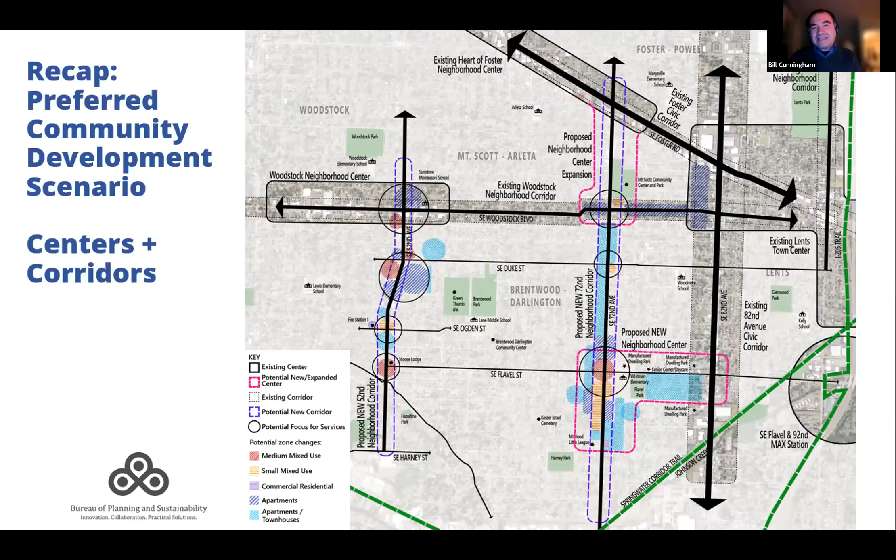Just one other thing I wanted to share with people is just to remind us of one reason for this effort: our existing designated neighborhood centers are places that really anchor the area with services, and that includes the Woodstock Neighborhood Center, as well as the Heart of Foster on Foster Boulevard, as well as the Lents Town Center. And as you're probably aware, there's a bit of a gap in terms of the Brentwood Darlington area in terms of having a robust business district and housing opportunities near a place like a center.

So that's part of the reason we're looking at that 72nd and Flavel area.

I want to put a caveat on what I'm sharing now. I sent in advance the concept for potential zone changes. What we did here was take our existing zoning map, so all the colors and zones shown are already in place, but we overlaid black outlines on areas we're looking at for potential zone changes, using red labeling to identify the potential new zones for those areas.

True to the concept, most of these zone changes are focused on the center locations and those corridors. It's impossible to make out this map, so I'm going to zoom into area-by-area discussion points. We'll hold off on discussion until we get there, but I also wanted to give people a refresher or overview of the zone changes we're looking at.

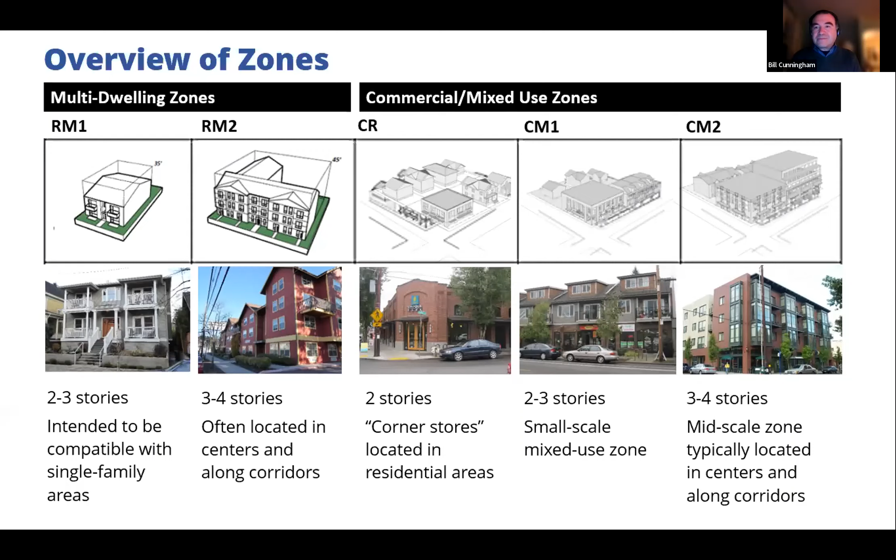I'm going to move us along. Just wanted to highlight topically the kinds of zone changes we're looking at, corresponding to the preferred scenario concept we had. There are some upzones at key intersections, which I've circled here. In many cases, we're going from the low-scale mixed-use CM1 zone and bumping up to the CM2 four-story scale. Also for the RM1 low-rise multi-dwelling zone, some of those existing zoned areas are being considered for RM2.

We also have a number of zone changes related to expanding multifamily housing options along the corridors. Especially along 72nd, this could involve zone changes from single-family residential to the low-rise RM1 zone. In some cases as well, especially along Woodstock, going from the low-rise RM1 zone to more of a corridor-scale RM2, especially when you're getting close to Lents. I'll zoom into that area a bit further.

And then we have our, whatever we're going to call it, but I'll call it the Brentwood-Darlington Neighborhood Center for now. The idea behind some of the potential zone changes here is we're adding additional commercial zoning to support the idea of that becoming a Main Street area or a commercial services hub for the community, and also providing additional multi-dwelling housing close to those existing and potential future services.

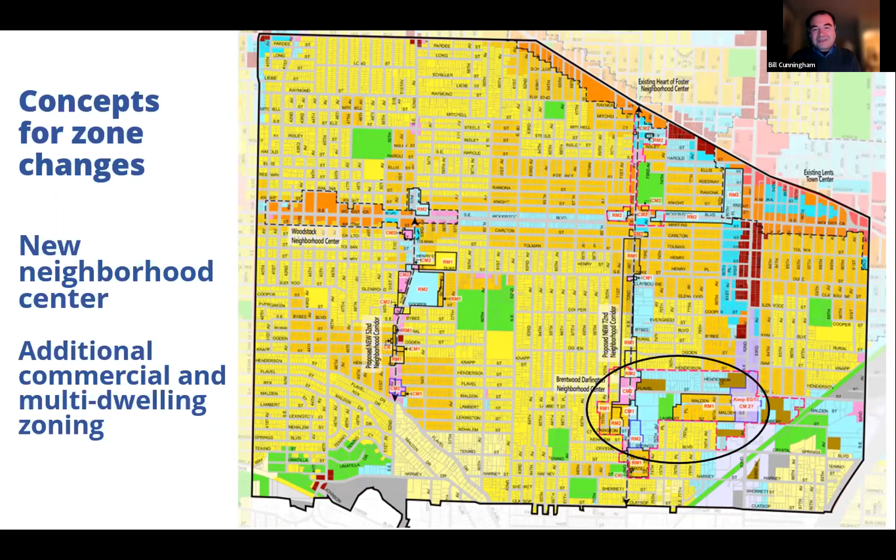Diving a bit deeper into that Brentwood-Darlington Neighborhood Center, just wanted to highlight again what we're talking about here. This is extending generally from the area around 72nd and Flavel, eastward towards 82nd. As I mentioned before, you can see with the red labels there's a number of CM2 and CM1 areas. In some cases, we'd be upzoning from residential to commercial mixed use to allow more commercial services opportunities, and also looking at expanding some of the multi-dwelling housing in the area.

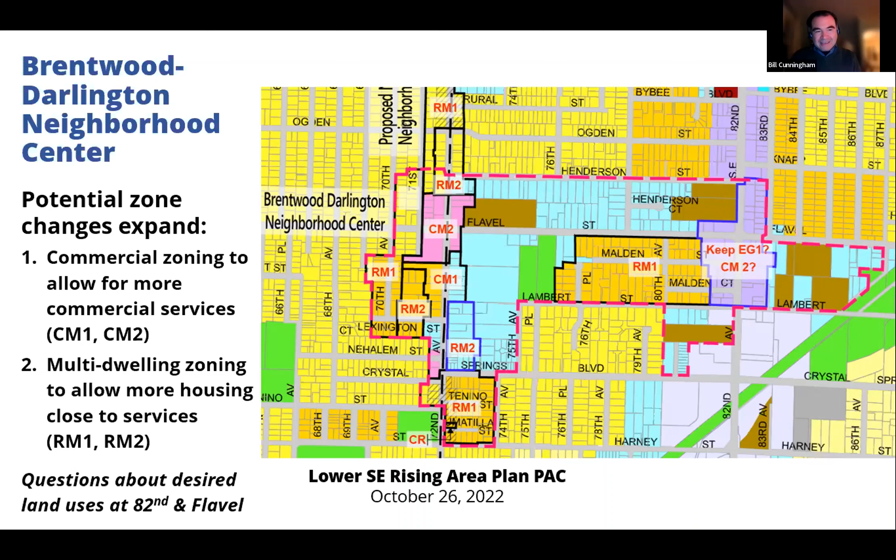This is a pretty complex area, so I'm going to jump right in and zoom in a little bit further, focusing first on the western end of that potential neighborhood center along 72nd, and just walk you through some of the things that could be happening here. One is where you have the existing commercial hub at Flavel and 72nd, which is currently CM1 zoned. We're looking at the idea of upzoning that to CM2 to allow 3 to 4 stories for what could be the core part of that neighborhood center.

And then perhaps a bigger move is extending the commercial zoning south along 72nd to foster a commercial Main Street along 72nd. You can see in the diagram where you have the orange and light blue, we'd be looking at extending or applying commercial zoning, the low-rise CM1 zone, southward for a block, and then probably another block or two south to Crystal Springs, at least on the western side of that street.

As you can also see, what's happening here is there's existing R2.5 zoning to the west of 72nd near a grocery outlet, and that already allows townhouse type development. We're looking at the idea of applying multi-dwelling zoning to even further broaden the kind of housing that could happen in that area, looking at RM2 zoning close to the corridor and RM1 zoning along 70th, moving a little bit further from the corridor.

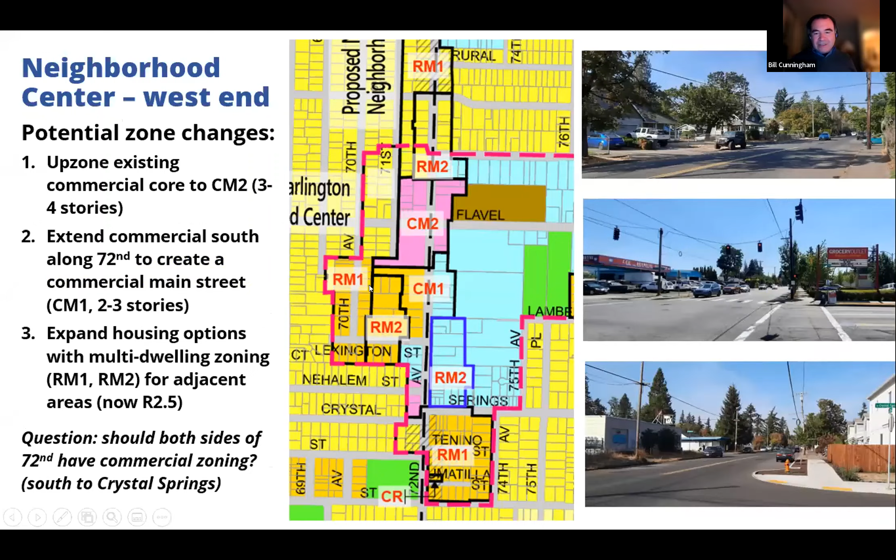72nd Avenue. So not straying too far away from the 72nd and Flavel area, there are a number of things happening here. Probably the most significant change would be much of the area along 72nd between Henderson and going up towards Woodstock has single family zoning, although most of it's R2.5, which allows townhouses. Part of the concept that came out of the preferred scenario was expanding housing opportunities on that corridor. So what this is showing is for the area along 72nd that's not already multi-dwelling zoning, changing the zoning to that low-rise RM1 zone. Based on the feedback we received from the last PAC meeting about the scenarios, the zoning would extend to 71st Avenue to the west.

Any thoughts about those changes along Woodstock? I should also mention there's potential application of RM2 over near the Woodstock and 72nd node, and some minor changes going to CM2 there as well, to allow a little bit greater scale at the commercial. Actually much of the commercial along 72nd, Woodstock North already has CM2 zoning. It would just be expanding that a little bit near that intersection. Thoughts on this one?

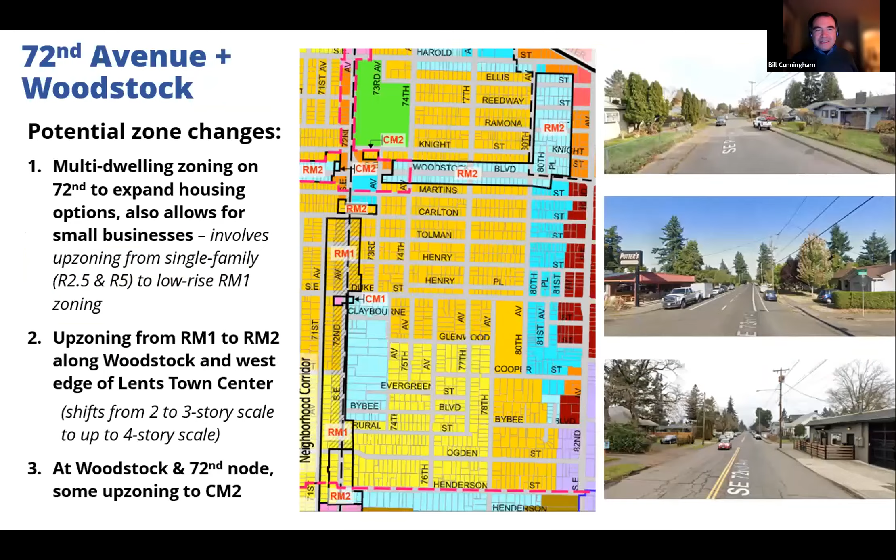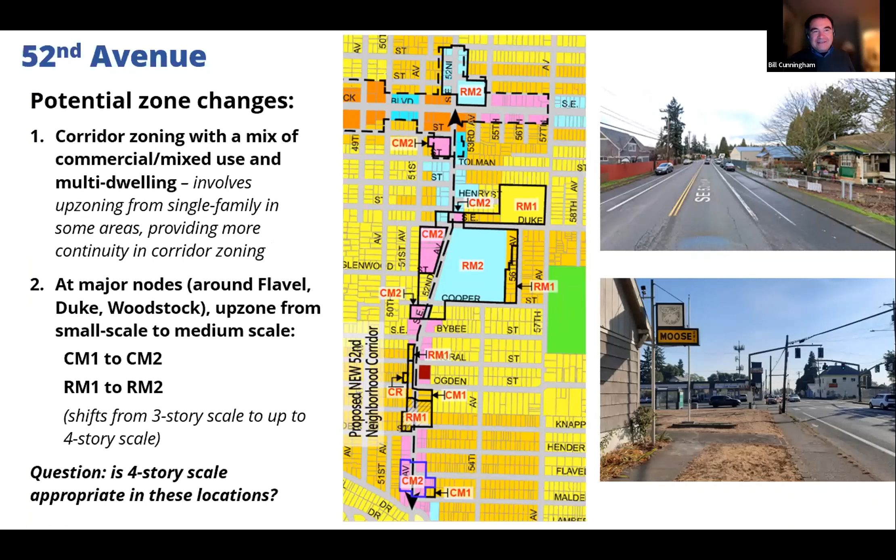You know, I'm going to move us on just to really set things up for people to provide comments later, because again we definitely want to capture more. We know there are additional thoughts, and one thing we wanted to highlight is that Cassie has created a concept board that you could link to now or later, post meeting. And we're interested in keeping that concept board open for a while, probably at least through next Monday, if not longer.

I'm going to stop sharing for a moment and see if Cassie wanted to walk you through that, at least the basics, where you can find this concept board and how you could provide comments. That's really to be one way of capturing more comments on these zone change ideas.

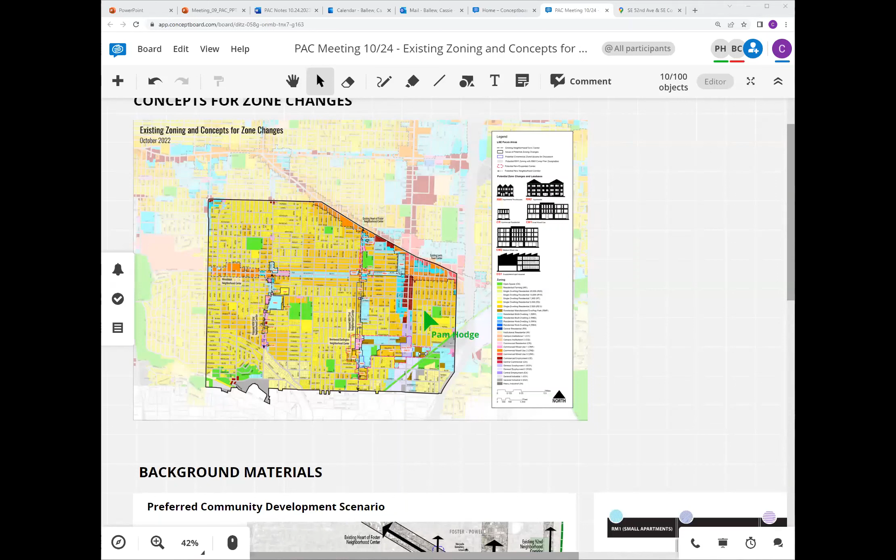So first I'm going to show you how to navigate, zoom in and out. The link that I gave you should bring you right to this zone map that Bill's been going over in detail.

To zoom in and out, if you're using a regular mouse, you can just use the wheel to go in and out. If you want to pan, you can use the hand up here in the corner. Down in the left corner, there's a selection of zoom tools, including if you have a trackpad, you can choose that as an option. It should give you the tool, and you can zoom in and out using that as well if your mouse is being a little clunky.

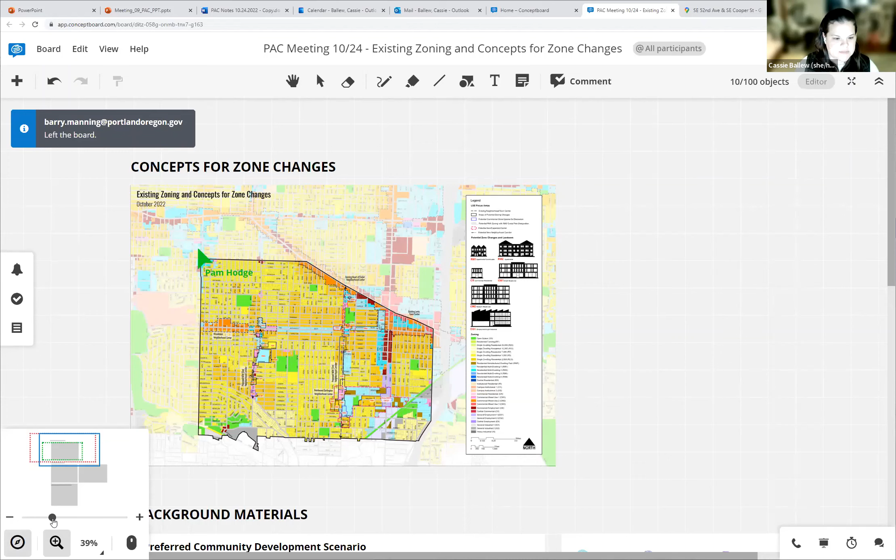So that's the 101 for navigation, pretty simple. If you want to see the entire board, you can choose this little compass here and it will zoom. It's not working for me right now, but if you do fit, you can fit the whole board on your screen and see everything.

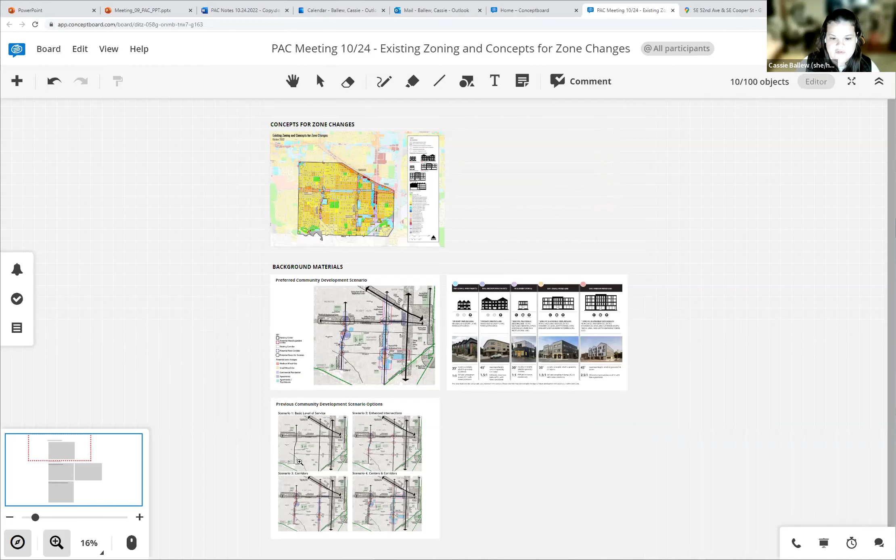While we're here, I'll show you what we've got on the board for you all to look at. There's the map that Bill's been going over, there's the original concept, the preferred development scenario that you've all seen a lot, a breakdown of the different types of land uses and zones in a little more detail, similar to the slide that Bill showed you earlier, and a reminder of the 4 scenarios we originally had to begin with.

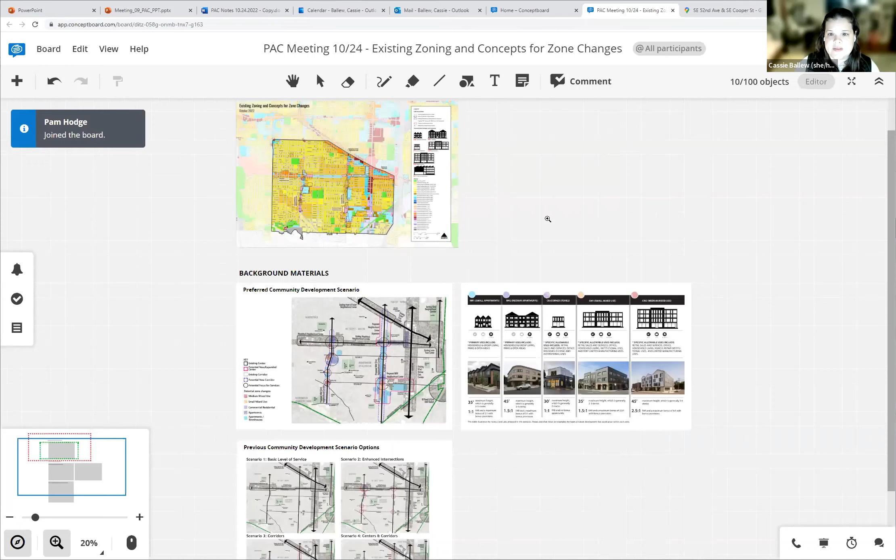Real quick, to show you how to leave a comment: up here there's a little comment tab in the gray toolbar. If you click on that, this is probably the easiest way to leave a comment. You just click on it and click wherever you're wanting to leave a comment on the board, and then provide your comment.

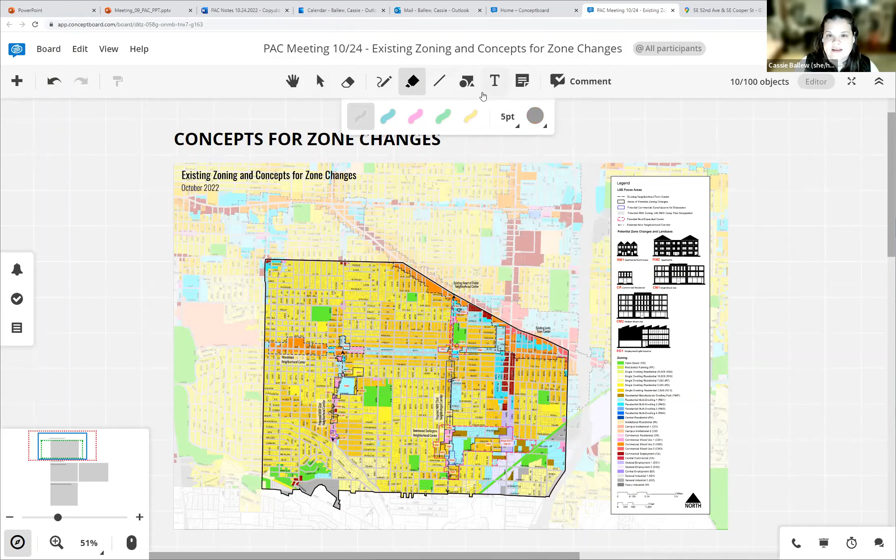The other easy way to provide a comment is if you want to leave a sticky note, you can choose your color, get fancy if you want, and leave it wherever you want on the board. Those are 2 really easy ways. If you want to draw, there's a scribble tool, a highlighter if you want to highlight anything, and some shape tools if you want to get really fancy.

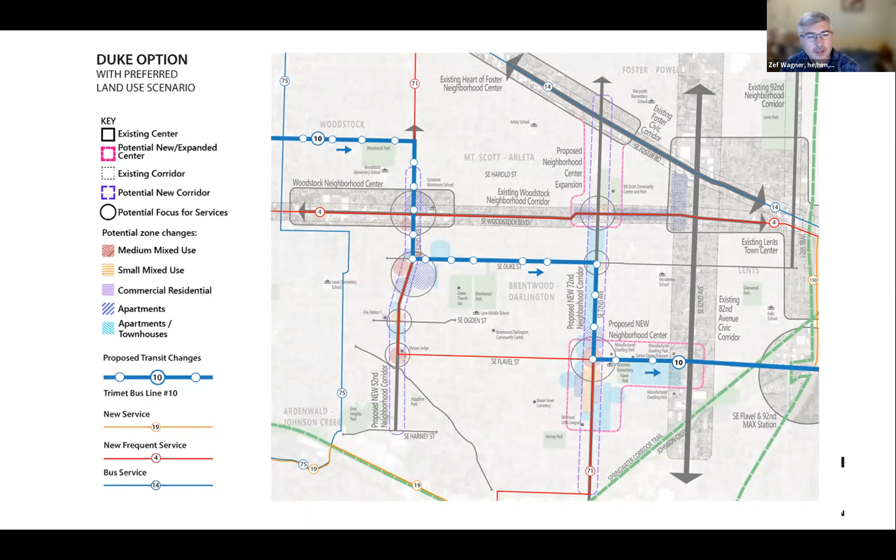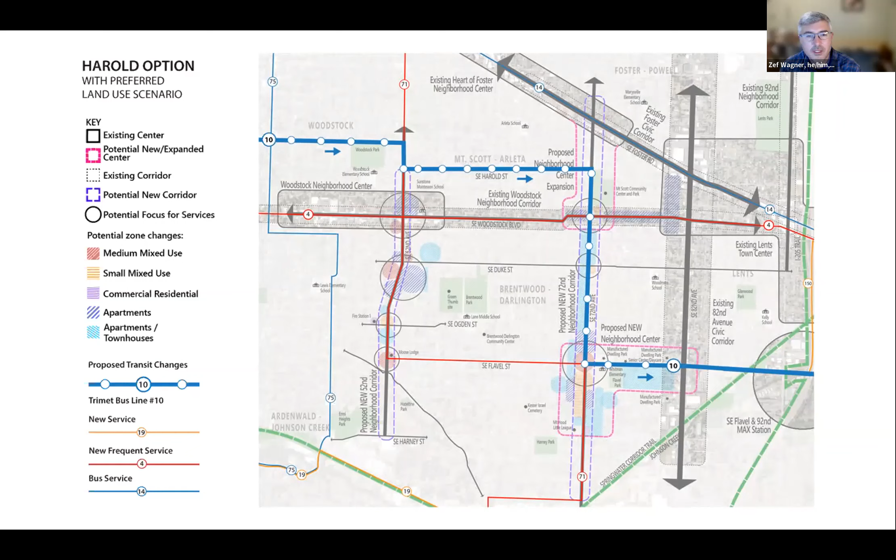The next slide shows the Harold option. The big advantage here is that it still gets pretty close to the Woodstock neighborhood center, but it also serves the Heart of Foster neighborhood center, now expanded down to Woodstock more directly. It would serve more of 72nd Avenue on its way down to 72nd and Flavel, and it would also serve the Mount Scott Community Center and the park, whereas the Duke option would skip that entirely.

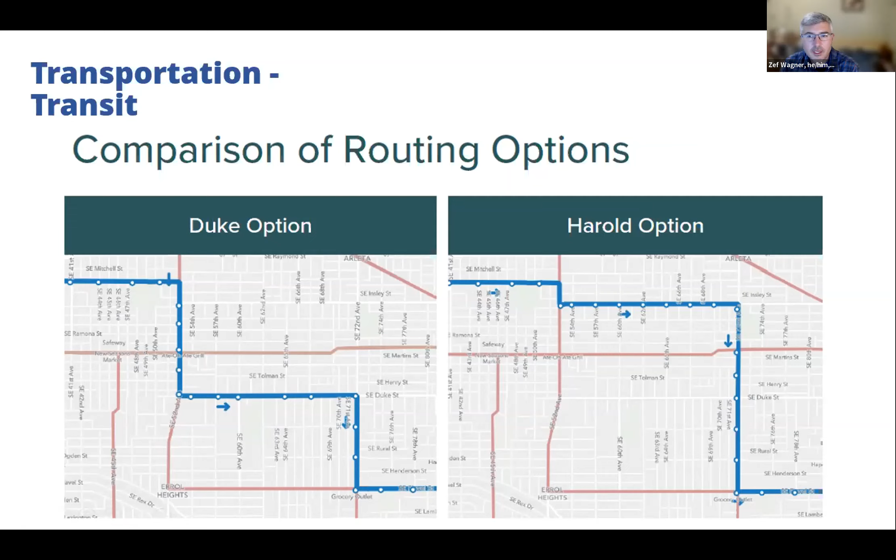We might need to move on in the interest of time. We've got some other types of projects to cover. We'll take all your comments, and feel free to send comments to me after the meeting as well. We want to craft our message to TriMet, and also decide what we should put in the plan. Like I said, we could put in a near-term recommendation and a long-term recommendation if we wanted to say that Duke should have bus service in the future. We can certainly do that. But we feel some time pressure to give TriMet a recommendation for the near term.

So we want to talk about these neighborhood greenways, corridor improvements, and local streets that we've talked to you about before. We've done some initial prioritization, and we're having trouble with some of it, and could really use your help deciding between some projects. So, next slide.

This is a general overview of how we're thinking about prioritizing projects. First we have our project list, and then we want to develop tier 1 and tier 2 projects. For this plan, it's not like we have a set dollar amount we're working with — we're going to have to seek funding for most of these projects. But the idea is that if everything's a priority, nothing's a priority, and it really helps to focus our attention. If something's a tier 2 project, it doesn't mean it's not a priority at all. It would go into our transportation system plan as eligible projects for funding.

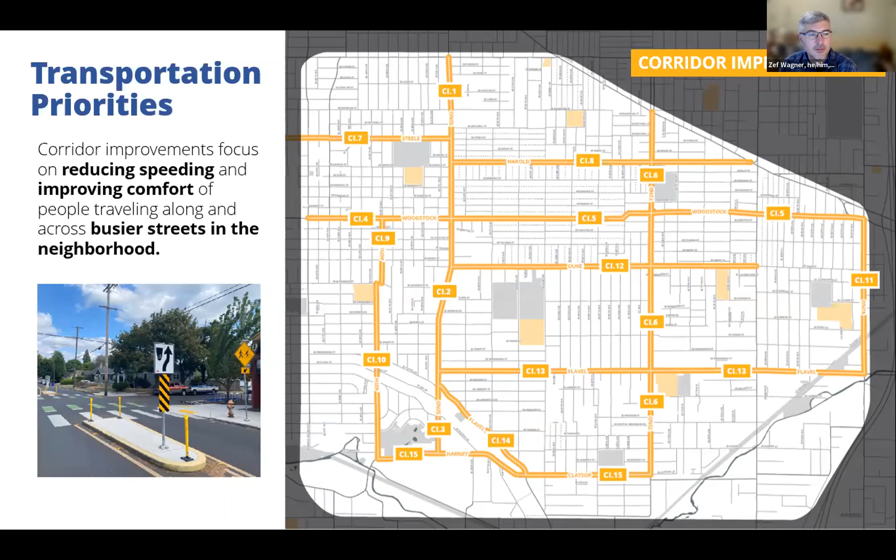The prioritization factors that we considered was whether it's serving an existing or proposed center or corridor, so really serving the land use. We tried to give more priority to projects within Brentwood-Darlington because that is our focus area. We looked at documented safety issues and crash rates on streets, and we prioritized some of those segments. We looked at connectivity, just how useful the network that develops is. We looked at transit service as part of that.

We looked at public support that we heard in our outreach, and thought about the needs versus the costs and the cost benefit. Our goal is to identify - this is somewhat arbitrary, but just to give ourselves some ground rules - we are aiming for small projects totaling about $5 million, and then 1 or 2 big projects that would go after grant funding of around that same size. That'll help us narrow this down.

Next slide. So this is where we kind of landed, at least our initial first pass. The bolder ones are the proposed tier 1 projects. The dashed ones are the proposed tier 2.

You'll see a lot of Woodstock on that list, east of 52nd Avenue. We have Flavel Street, the whole stretch. Woodstock and Flavel both serve multiple neighborhood centers, so that seems like clear winners there. Same with 72nd Avenue, connecting the two proposed neighborhood centers together.

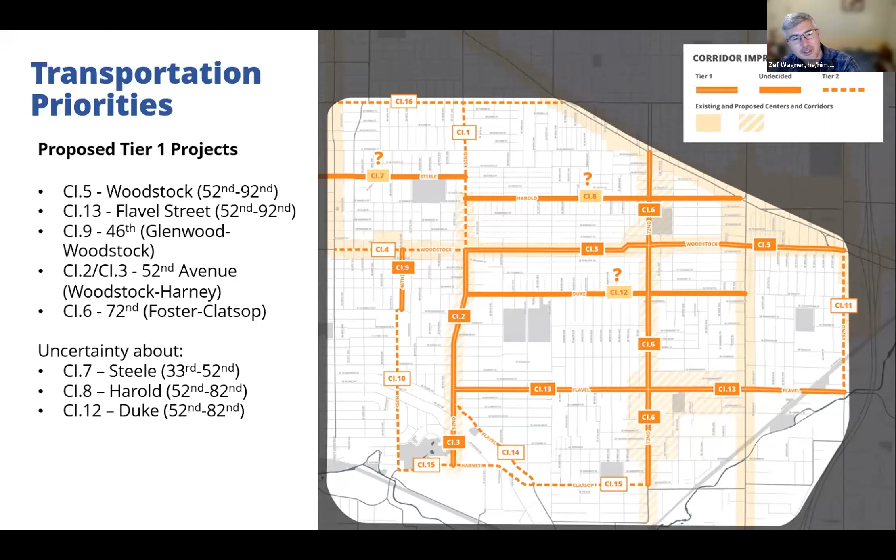We can skip past this, this is just another description of those projects. So getting into neighborhood greenways. These are local streets where we build our bike network. You can see the existing bikeways and funded bikeways in the narrower lines in the background. And then you can see all of our neighborhood greenways we proposed.

We did make a couple changes since the last time we talked. We did add back a neighborhood greenway on Tolman west of 52nd, even though that needs street paving, because we got a lot of feedback in favor of that project. We also consolidated the greenways around 60th Avenue to just all be on 60th Avenue. So we thought this provides a really nice north-south connection through the neighborhood and provides some of those connections to the school and the park, by biking and walking that we know are important. So next slide.

So the prioritization factors we looked at were equal spacing of the greenways to provide coverage around the neighborhoods, connectivity to destinations and land uses, and overall usefulness. Is it a long greenway or just a short little connection that's not very useful? We also focused on serving Brentwood Darlington, low cost and easy to implement, and thinking about the public support that we got.

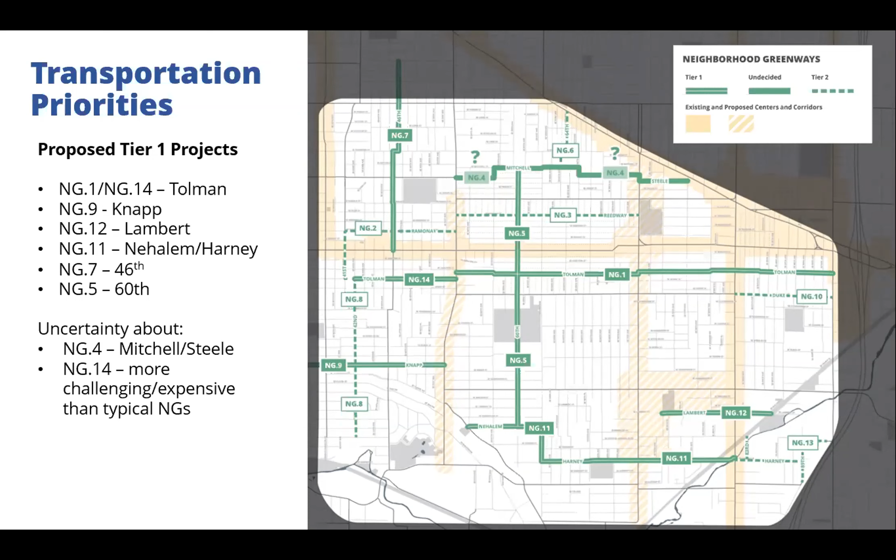So, Misa? Sorry, you kind of answered this, but again, whenever I look at Brentwood Darlington maps, I see big gaps and deserts, and I don't see a greenway. I see one on Harney, and then I see Tolman, and so Ogden is going to become a greenway to connect to Knapp.

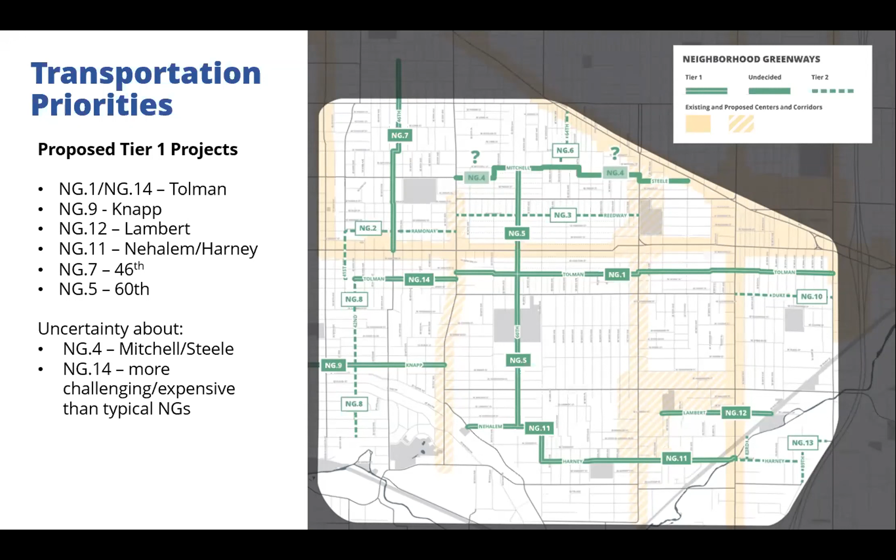Yeah, so I apologize, we meant to update this map to show the funded greenways, because otherwise it looks like there's a big gap there, but there really isn't. I think if you go to the next slide, we have some slides that show this spacing a lot better.

So this shows buffers around the greenways. For the north-south greenways, we have the 80s greenway in Lents, the 70s greenway which is funded, and the 60s greenway that's funded. And then this tier 1 project on 60th Avenue and the tier 1 project on 46th would complete the network of those north-south connections.

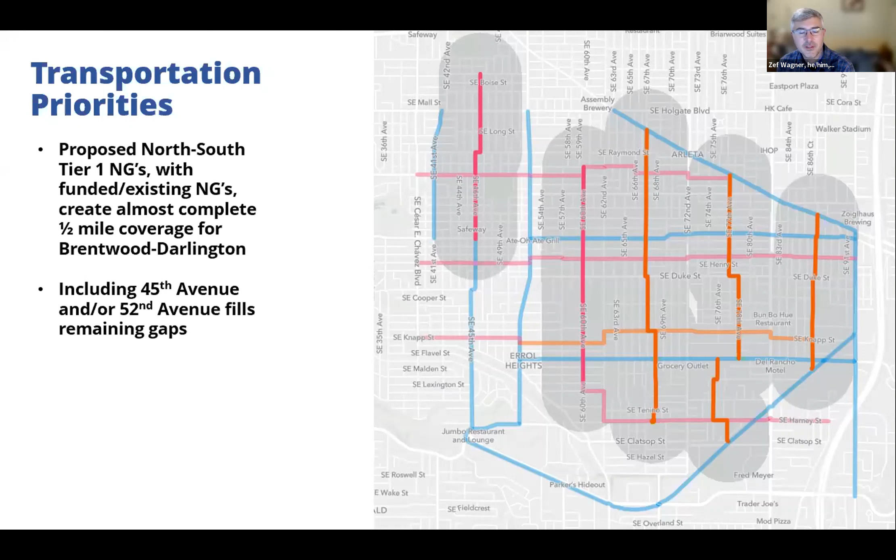And then in combination with 52nd Avenue bike lane improvements, the next slide shows the east-west ones. There you'll see the Knapp Ogden Greenway, which is funded from 52nd to 87th, and it shows how Tolman, Harney, and the Steele Mitchell Greenways would complete the network.

Yeah, so the reason there's that big gap there is that we have so many projects already funded for the Brentwood Darlington area. Okay, thank you. Any other thoughts?

Yeah, we're definitely aware of that, and I think that's part of the next step, is to really refine these projects and figure out if that's exactly the right route, or if we should go up another street, and what kind of crossing we'd need if we did have it on Knapp. This is a little more high-level at the network perspective, but I totally agree, I've crossed there before and I know how scary it is. If we do cross there, we would need some kind of flashing signals for sure.

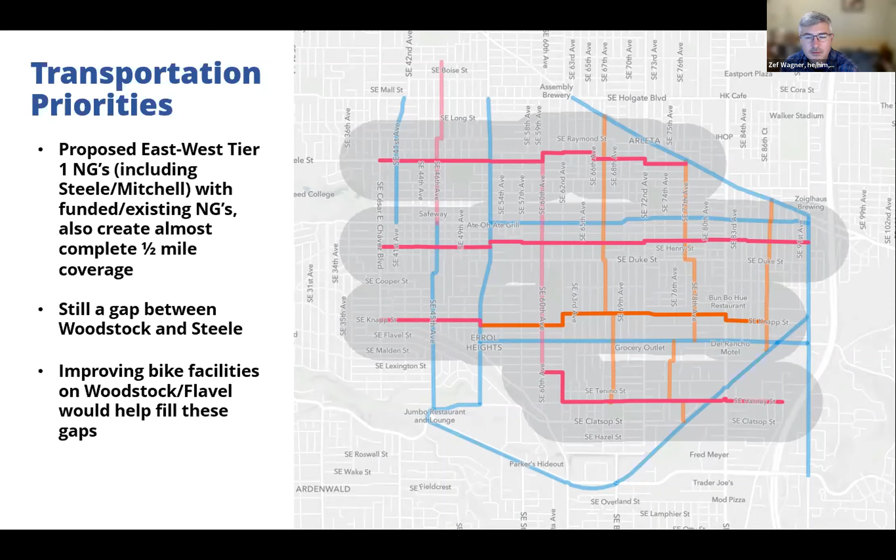So next slide, we can run through these pretty quick. So these local streets, we're treating a little bit differently. These are kind of like traffic calming programs and street paving programs, a little bit different than just regular projects.

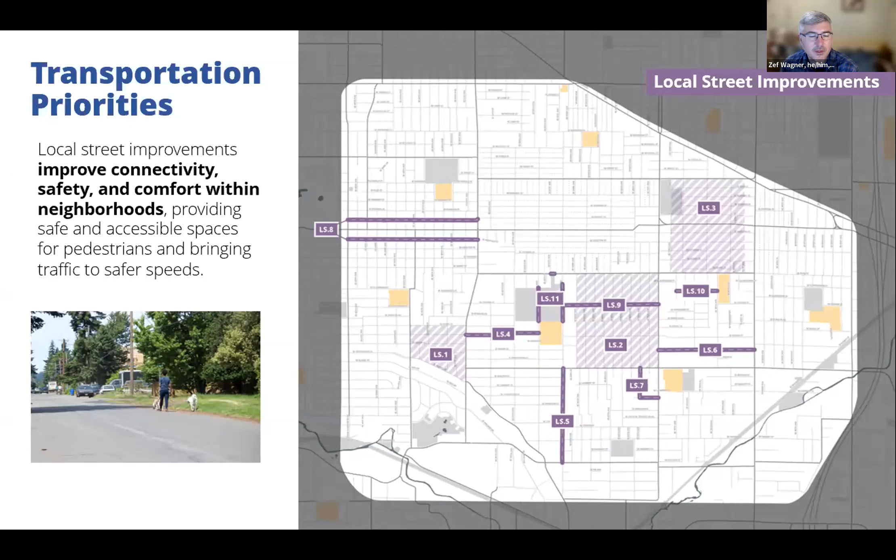I think we have a description of how we'll treat these. Basically, the long and short of it is we don't have a paving gravel streets program that's funded. We have a program building gravel streets in certain areas like Errol Heights, Cully, and Southwest, but those funds are specifically targeted at those areas. So right now we don't have anything like that.

We also have a traffic calming program, but it's completely programmed out for several years. So rather than prioritizing projects, we're going to talk in the plan about how we try to address these needs—things like trying to do traffic counts in these traffic calming areas to make sure we understand what's happening, and trying to do opportunistic things if we do repaving projects to add traffic calming. We would still have recommendations in the plan for what streets should be paved eventually and traffic calmed, but it's just a bit of a different category with these local street improvements.

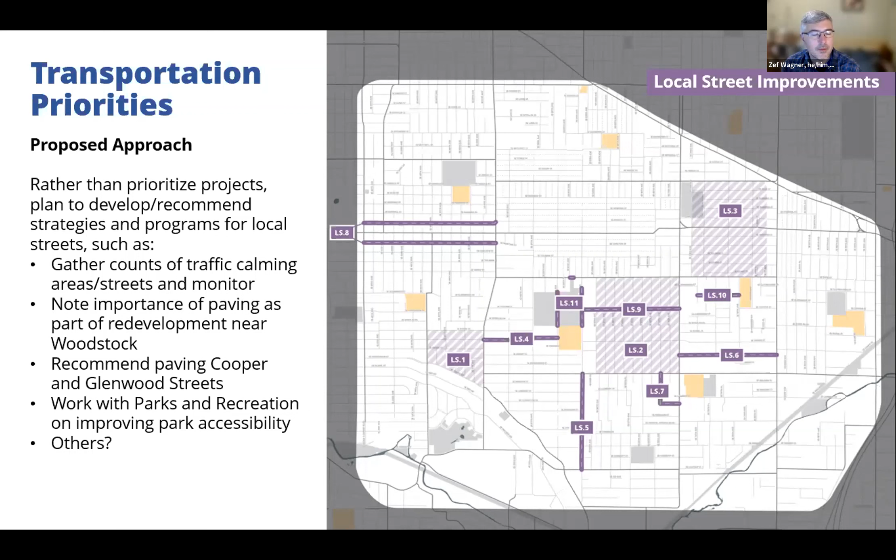So the next thing we could talk about is really getting into the weeds of how the streets would be redesigned essentially. Tier 2 projects, we would do less of that sort of project development on, but they would still be in the plan as city priorities and still be eligible for funding.